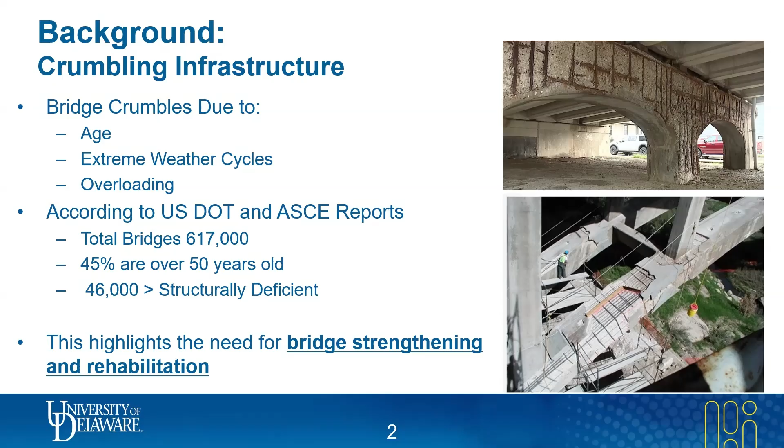Several methods have been used for strengthening existing infrastructure. One is concrete jacketing, in which we add a reinforced concrete layer to the existing structure. Likewise, in steel plate bonding, we bond steel plates using anchors to the existing structure to improve its performance. But these are old and traditional techniques, and they are labor intensive and less efficient. We need efficient techniques using smart materials and smart techniques, and one of them is FRP strengthening.

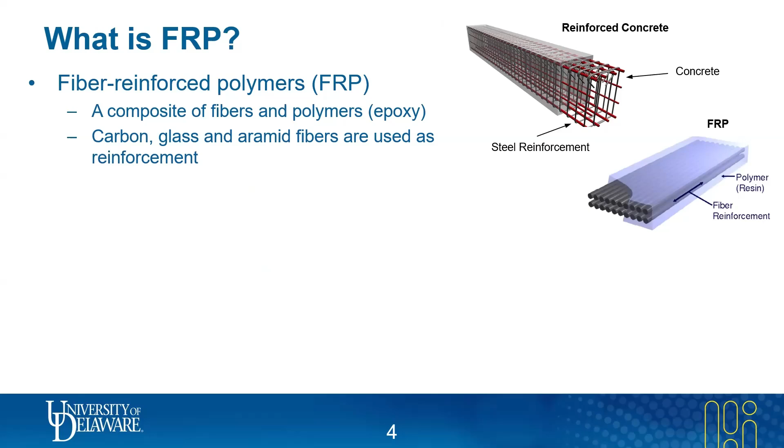So now what is FRP? FRP is a composite of fibers and polymers. If I give you the example of reinforced concrete, which is also a composite material, in reinforced concrete, steel rebars are used as reinforcement and concrete as a matrix. Likewise, in FRP, polymer is used as a matrix, and fibers, which are on the order of micrometers, are used as reinforcement. These fibers can be glass, carbon, or aramid. These are various types of fibers used in FRP composites.

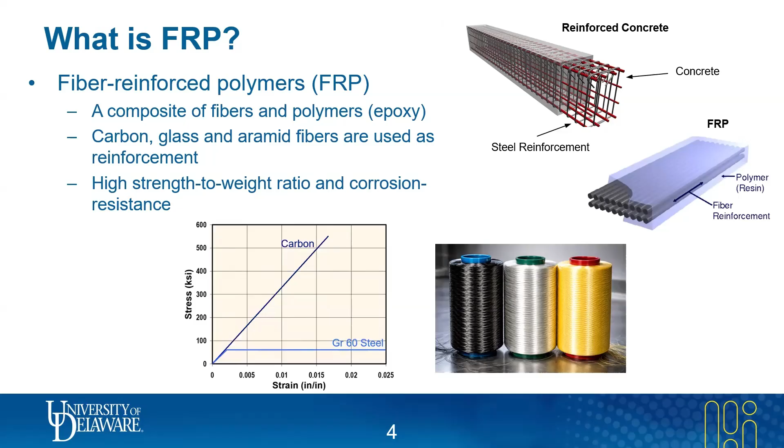Now the question is why we are using FRP. It has very low weight and very high strength, and it is also corrosion resistant as compared to steel. Comparing with steel, FRP is 10 times stronger in tension, and likewise 10 times lighter in weight than steel.

FRP is used in the construction industry in various forms. It is used as rebars, an alternative to steel rebars. Likewise, FRP pultruded sections are used to replace W sections, I sections, and S sections. It is also used as fabric sheets, bonded to existing structures for repair and strengthening procedures, and this is the topic of my presentation.

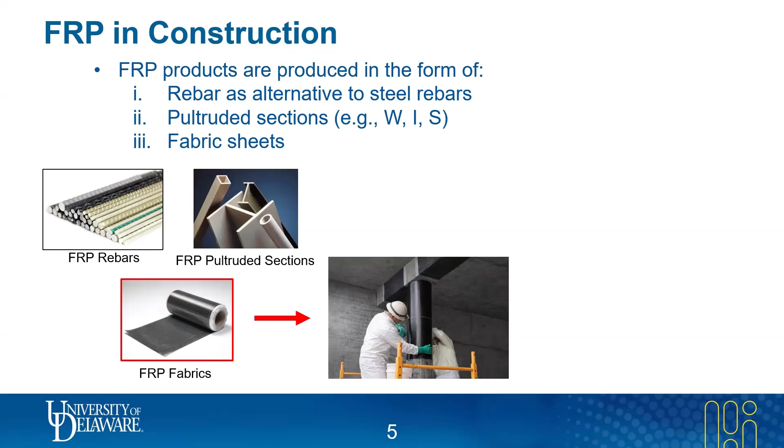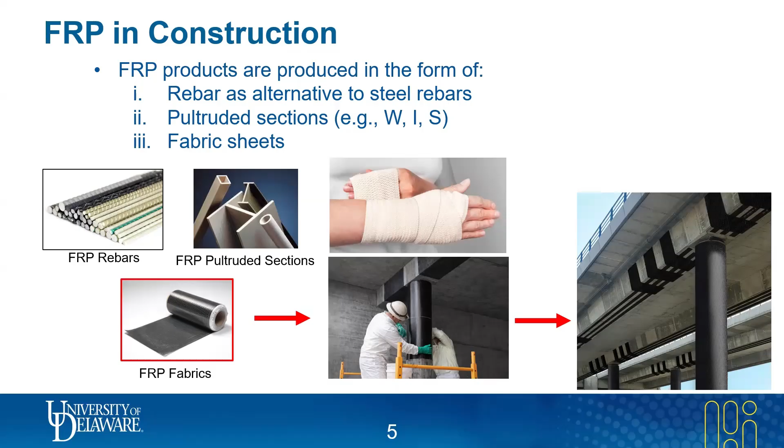In these pictures, you can see how FRP sheets, which are in the order of millimeter thickness, are bonded to the existing surface of structures. This way, you can improve its axial performance, shear performance, and flexural performance. In these images, you can see how FRPs are installed around columns and girders, including U-shaped strips of FRP, called U-wraps.

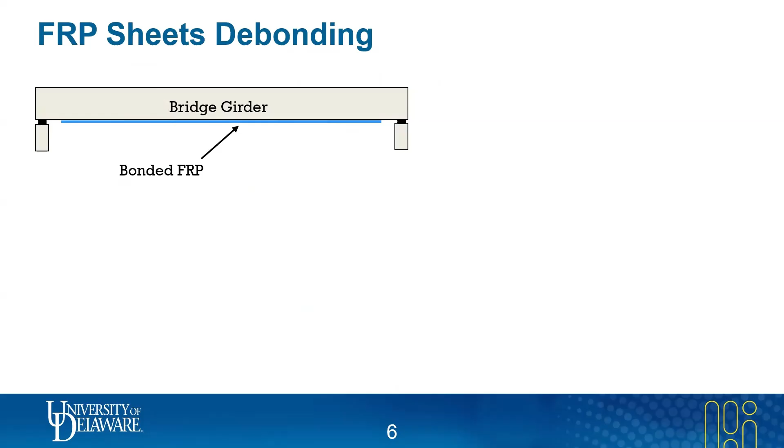There is a problem associated with the use of FRP called premature debonding. In this image, you can see a bridge girder where FRP is bonded to the tension side of the girder, but once the load comes, it prematurely debonds. This debonding occurs at a very low stress level, even around 50% of the strength of the FRP.

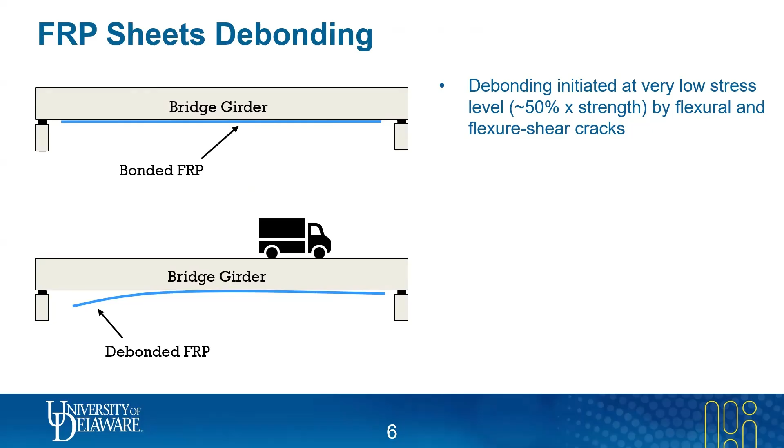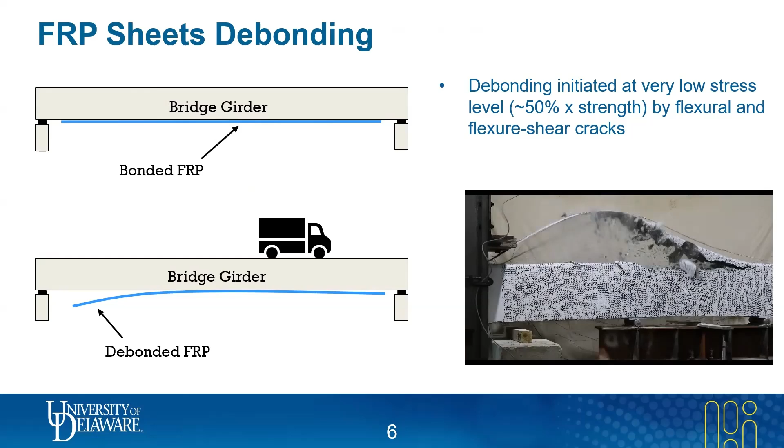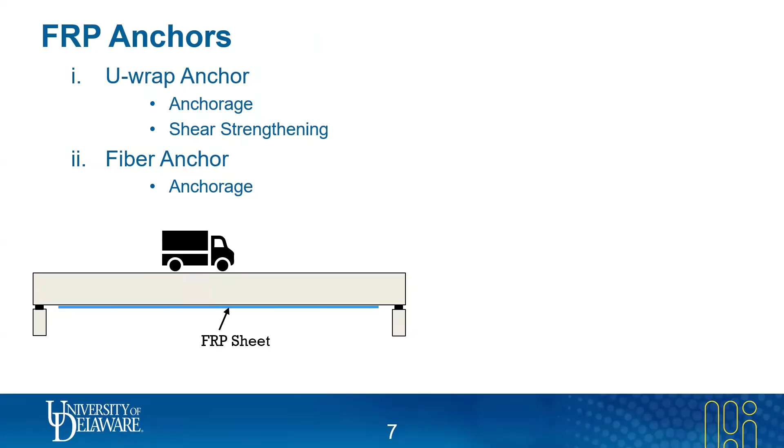Now, how do we handle or mitigate debonding? Various kinds of anchors are used, and the two popular ones are U-wrap anchors and fiber anchors. U-wraps are also used as shear reinforcement for strengthening the shear performance of a girder or beam. They are U-shaped strips of CFRP bonded to the soffit and two side faces of the girder or beam, acting as an anchor for the flexural CFRP as well as for shear reinforcement.

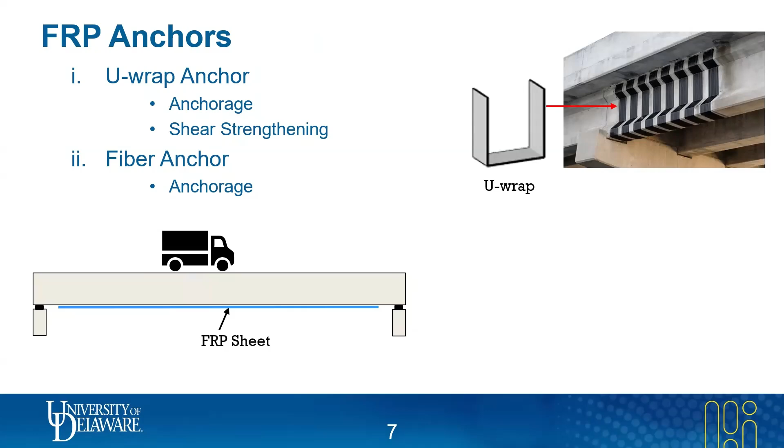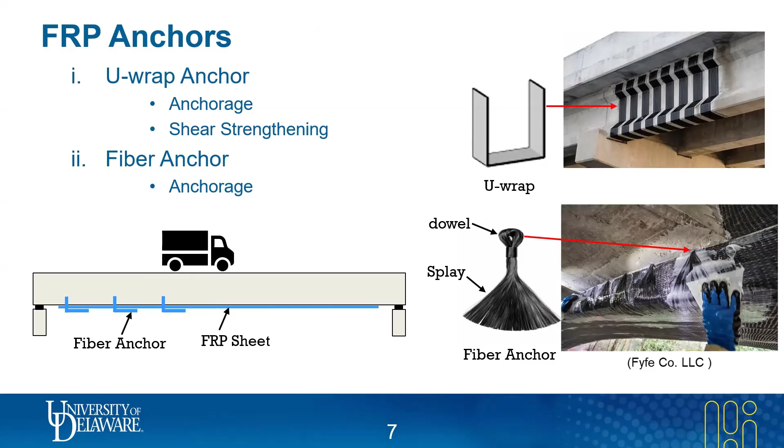The second anchor type is fiber anchors, which are bundles of fibers with two parts: dowel and splay. The dowel parts are inserted into the concrete using pre-drilled holes, and the splay parts are bonded to the existing FRP, introducing a mechanical anchorage between the substrate and the CFRP. You can see in these images how they are installed in the girders.

We also have codes and guidelines, because in the construction industry we need codes and guidelines to protect people from poor construction and design. For FRP, the recently published guideline is ACI 440.13, published in 2024, the first code for FRP application in the construction industry. Likewise, the updated version of the AASHTO code was also published in 2023.

These codes provide ways to compute the contribution of FRP in existing structures. We can compute this easily using the stress and cross-sectional area of the steel, giving us the moment capacity of the beam. But if we add CFRP on the tension side, we can add the moment contribution of the FRP to the existing beam as well. For this, we need the stress in the FRP.

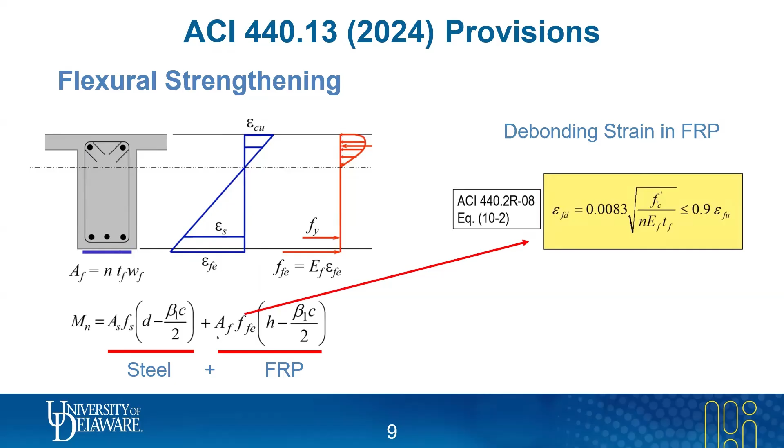To compute stress, you can compute it from the strain, called the debonding strain. This is an empirical equation you can utilize to compute the strain, and from that strain you can further compute the stress to determine the moment capacity.

Likewise, ACI provisions are also available for shear, for supplemental shear reinforcement using U-wraps. For the U-wrap contribution to shear, the same truss model used for steel is applied. In this model, the only variable is the strain in the FRP, computed using these equations, which are functions of concrete strength and the height of the U-wraps.

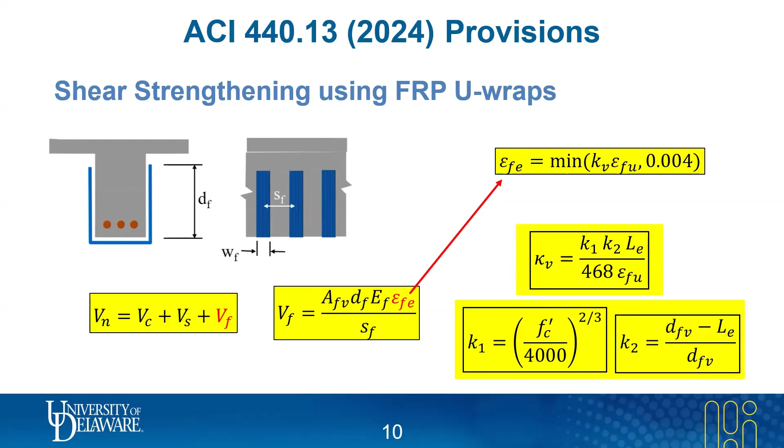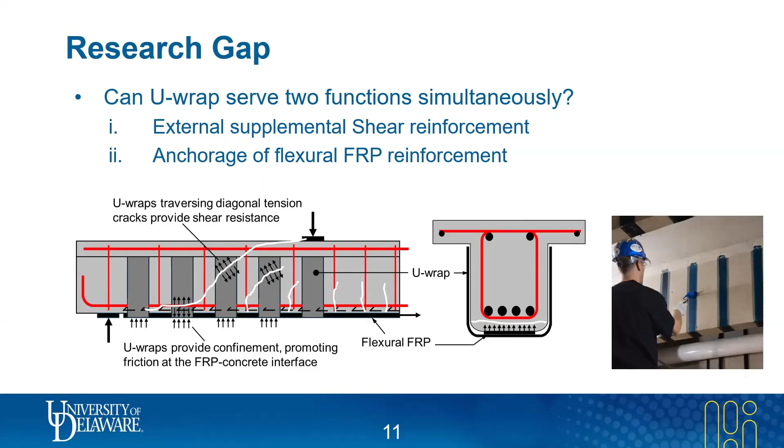So now, what is the research gap? I discussed U-wraps, which are used as an anchor for flexural FRP and also as supplemental shear reinforcement. But the question is, can U-wraps serve two functions simultaneously in a beam? There might be instances where a beam is deficient in both shear and flexure, where we could utilize U-wraps to enhance both flexural capacity and shear capacity. This is the research gap not yet investigated in existing literature, and we aim to find the answer to these questions.

To fill this gap, we designed our study with two objectives. The first is to investigate the complementary shear strengthening and anchorage effect of U-wraps in reinforced concrete beams strengthened with externally bonded CFRP laminates. The second is to make design recommendations for the efficient use of U-wraps as supplemental shear reinforcement and anchorage. To achieve these objectives, we developed a test matrix of 18 large-scale reinforced concrete beams.

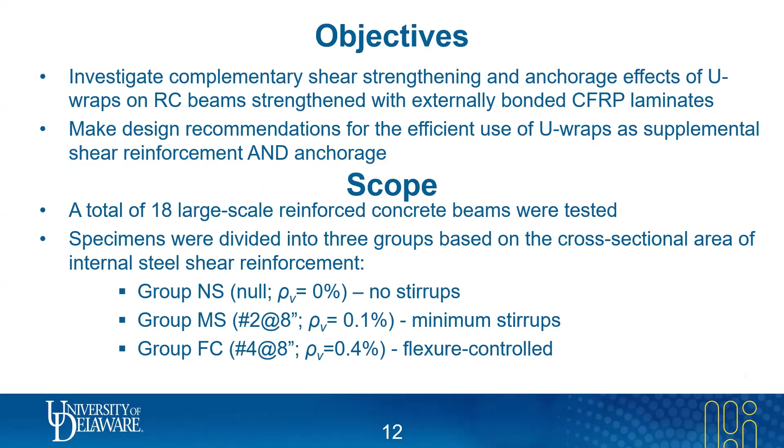We divided the beam into three groups. The first group is called NS, with no stirrups. The second group is with minimum stirrups, number 2 at 8 inches center to center. The third group we designed with sufficient shear reinforcement, so they just fail in flexure, and the reinforcement was number 4 at 8 inches center to center.

This is the drawing of the specimen we tested. You can see it is 16 feet long, and it is tested on a 14 feet span. We use typical concrete with 4,000 psi strength, and the reinforcing steel was grade 60.

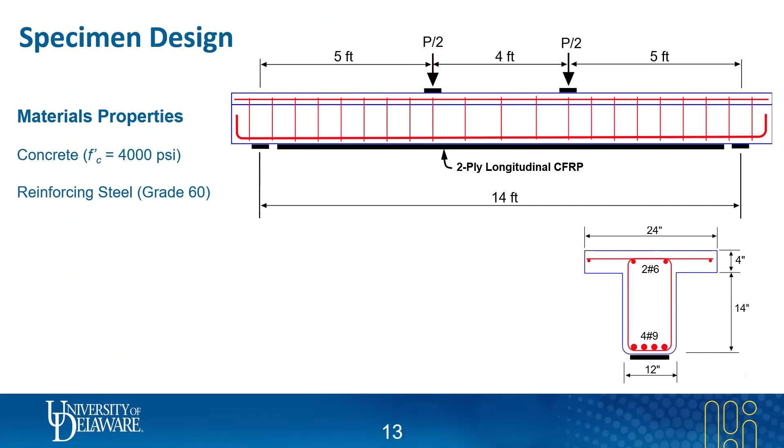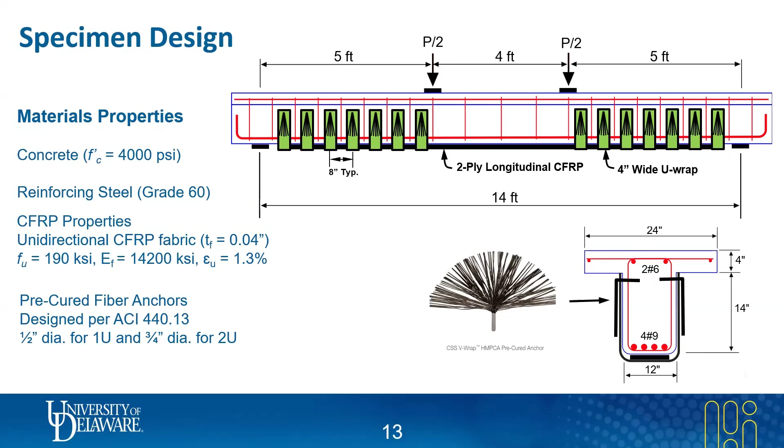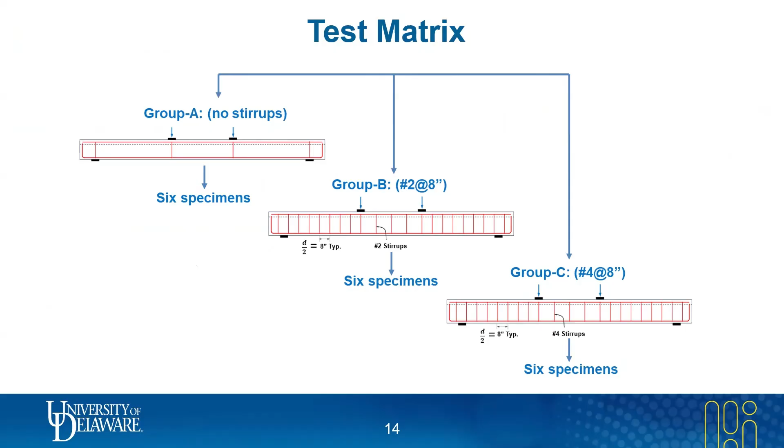These are the drawings of the control specimen in each group. In the first group, we have no stirrups. In the second group, we have number 2 at 8 center to center stirrups. And in the third group, we have number 4 at 8 center to center.

These are the drawings for the specimen in which we use various configurations of U-wraps. For group A and B, in which we have minimum shear reinforcement and no stirrups, we use the same configuration of U-wraps. You can see we have 0 U-wrap meaning no U-wraps, then single ply U-wraps, then 2 ply U-wraps, and then anchored single ply and 2 ply U-wraps.

On the right side, you can see group C specimen. In these specimens, we only install U-wraps without any fiber anchors. And for the combination of U-wraps, you can see again we have single ply, 2 ply U-wraps, and we also introduce reduced height U-wraps and full U-wraps.

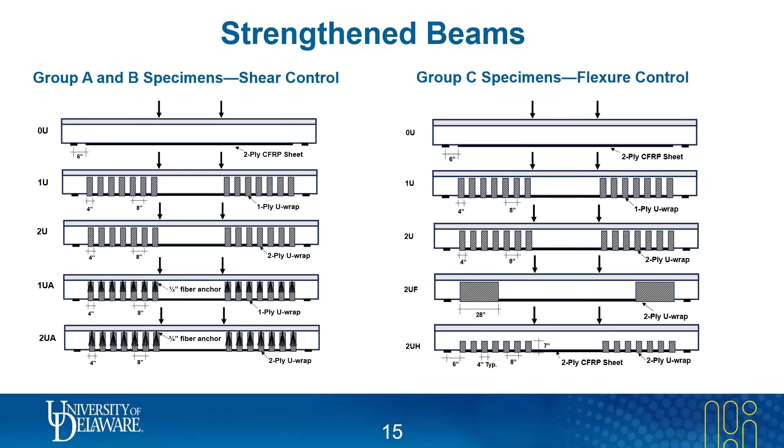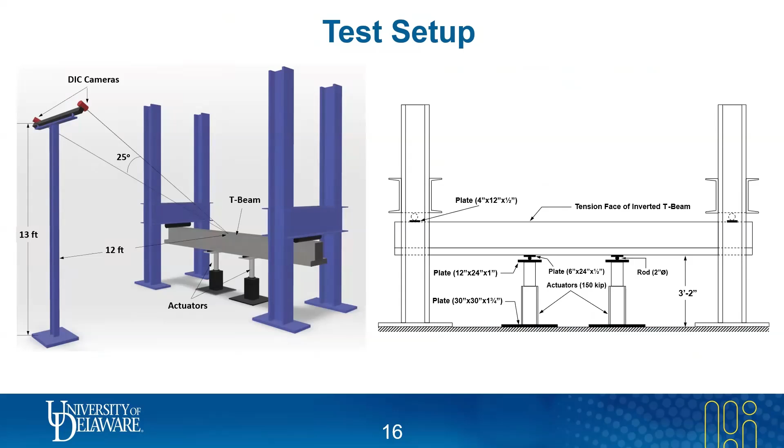We tested these specimens in a typical 4-point bending setup. We installed the beam in inverted orientation, so as to utilize digital image correlation for full field strain mapping and displacement.

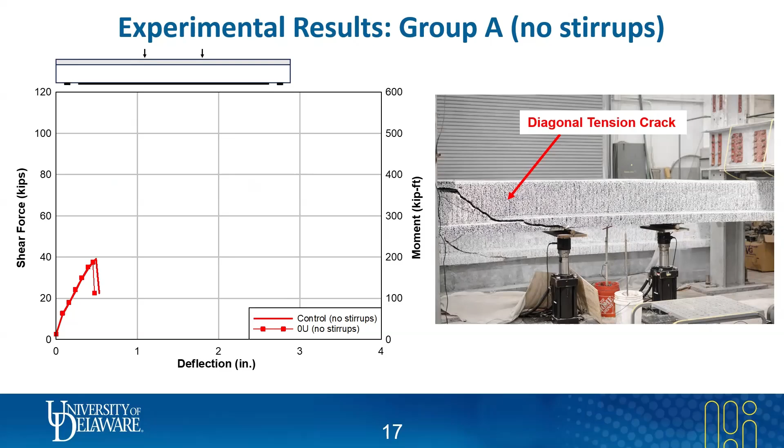Now I'm presenting the results, and I will go group wise. Starting from group A, in which we have no stirrups. On this plot, you can see the shear, the load displacement plot. The first specimen, which is the control specimen without any U-wraps, you can see its load displacement plot. On the right side, you can see it failed in typical diagonal tension cracks, and you can see the crack pattern as well.

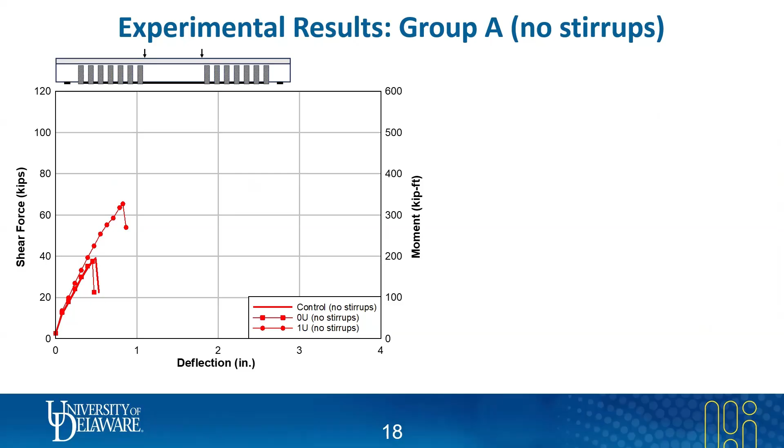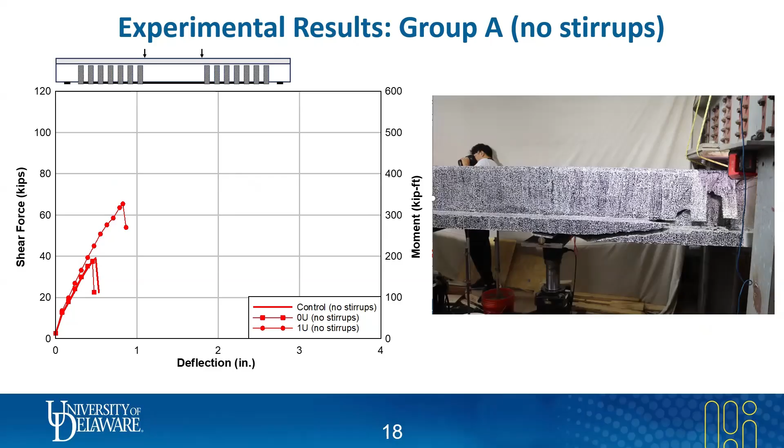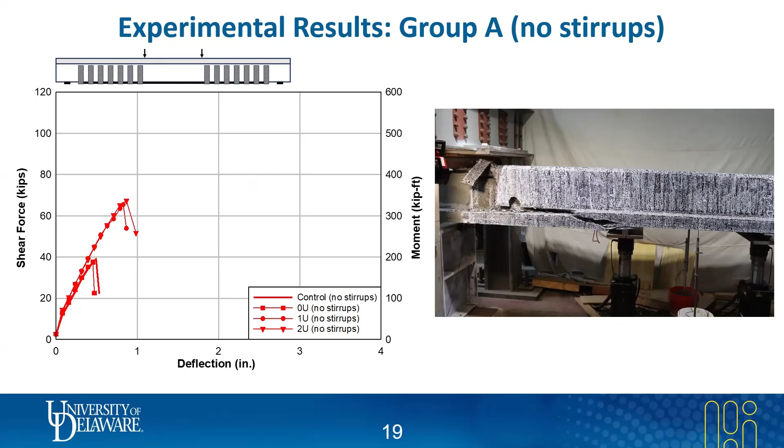Then we added single ply U-wraps. By adding single ply U-wraps, the capacity increased from around 40 kips to more than 60 kips, and the failure mode is U-wrap debonding followed by typical diagonal tension cracking. Then we add a second ply. By using the second ply, we didn't achieve any considerable enhancement in shear capacity, and we also achieved the same failure mode: U-wrap debonding followed by tension cracking.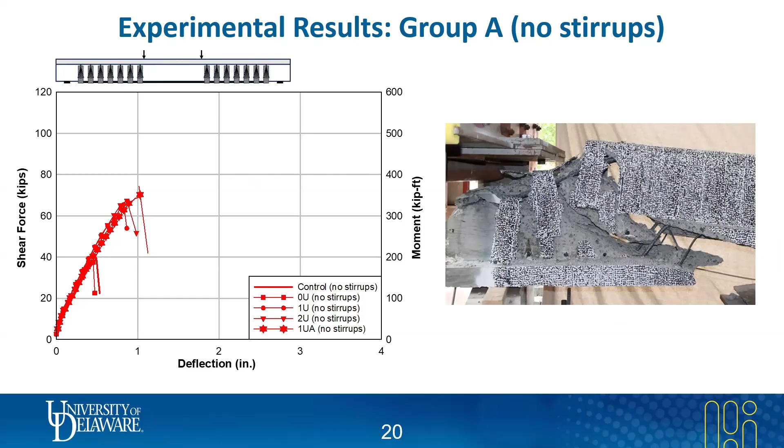Then we install single ply U-wraps with anchors, and in this case we also achieved shear failure, with capacity enhanced a little bit by 10%, and we achieved the typical shear failure as well. Then we further add the two-ply U-wraps with fiber anchors. In this case, the beam transitions past the yield point, and the capacity is further increased to more than 80 kips. We were able to achieve up to 95% increase in capacity using anchored two-ply U-wraps, and this also failed in shear.

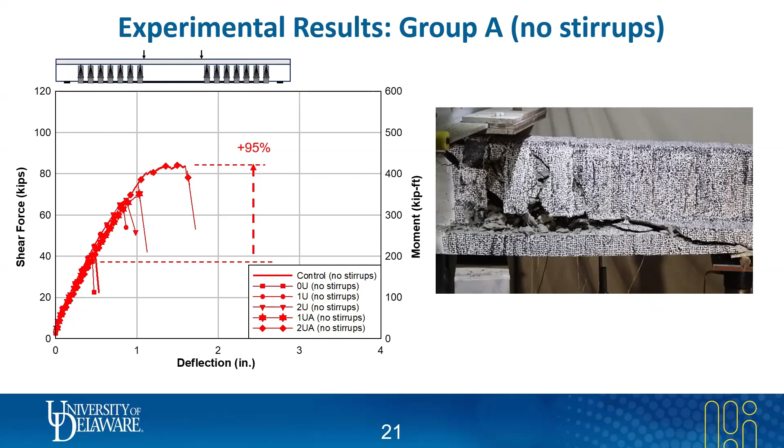Now I'm moving to the second group. In this group, we install number 2 stirrups at 8-inch center. Now you can see the load displacement response of the control specimen. We achieved more than 45 kips capacity, and you can see the typical diagonal tension cracking failure mode on the right side.

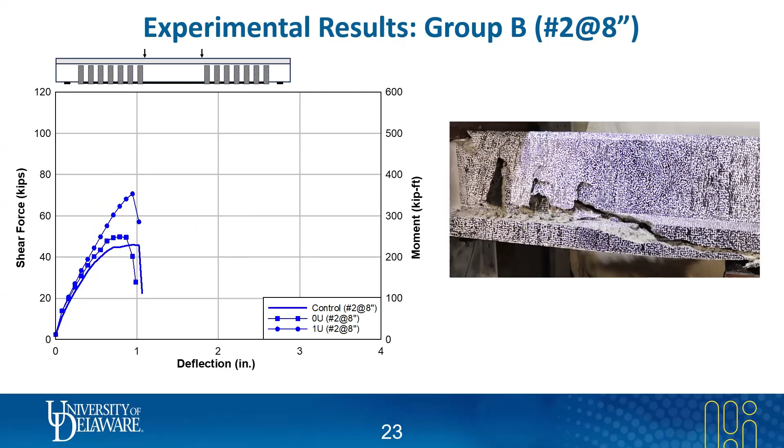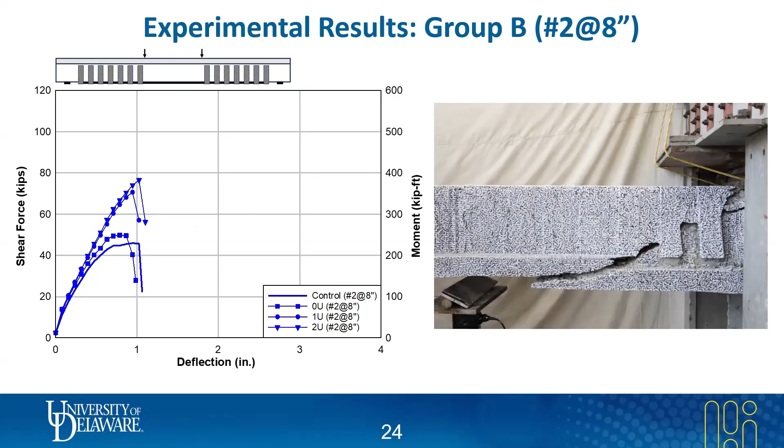If we then add the single ply U-wraps, the capacity was increased, and we also achieved the same failure mode. Then by adding two-ply U-wraps, we also achieve capacity enhancement, but the enhancement compared to single-ply U-wrap was not significant. The failure mode, you can see again, is U-wrap debonding followed by tension cracking.

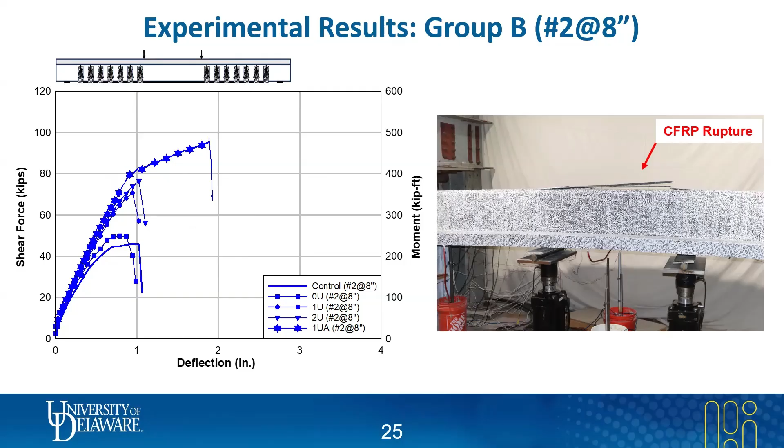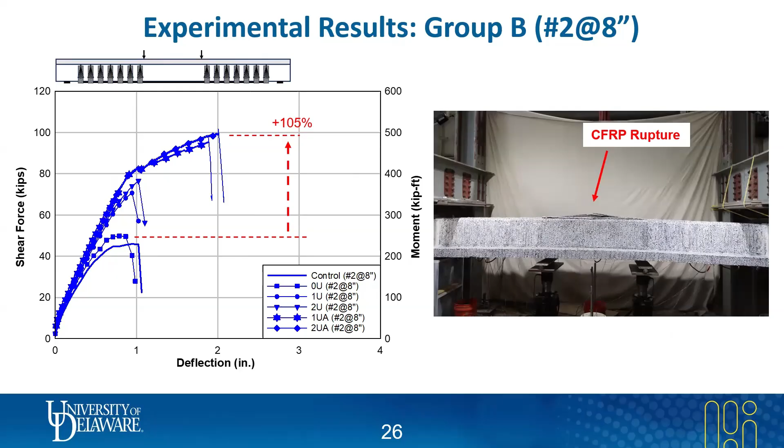Now, when we use the anchored single-ply U-wraps, the failure mode changed from shear to flexure, and you can see we achieve flexure failure, specifically flexure CFRP rupture, with capacity also considerably enhanced. Also, by adding the second ply anchored U-wrap, we again achieved the same CFRP rupture failure, and the capacity increase was around 105% compared to the control specimen.

Now I'm moving to the third group. In this group, we have only flexure control specimens. This is the typical load displacement plot of the control specimen. You can see we have a trilinear plot: uncracked, followed by cracking, and then we have the yielding of the steel as well.

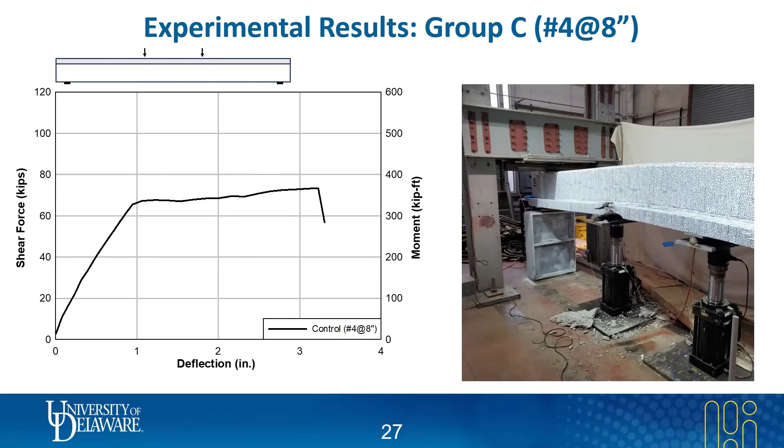This is the specimen with 0U, which has only flexure CFRP. By adding flexure CFRP, we increase the capacity up to 80 kip, but the failure mode is premature IC debonding, and we didn't utilize the full capacity of the CFRP.

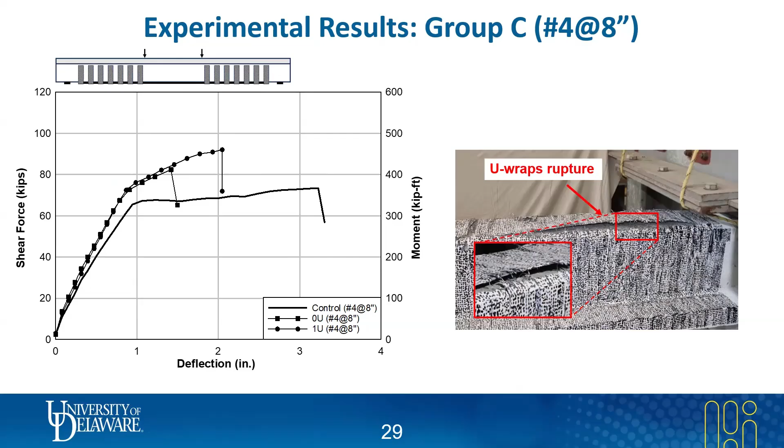So then we add the U-wraps. By adding U-wraps, we increase the moment capacity of the beam, and the failure mode also changed from IC debonding to rupture of the U-wraps. Further, by adding two-ply U-wraps, we were able to mitigate the ICD bonding failure mode, and in this case the failure mode was U-wrap debonding instead of rupture.

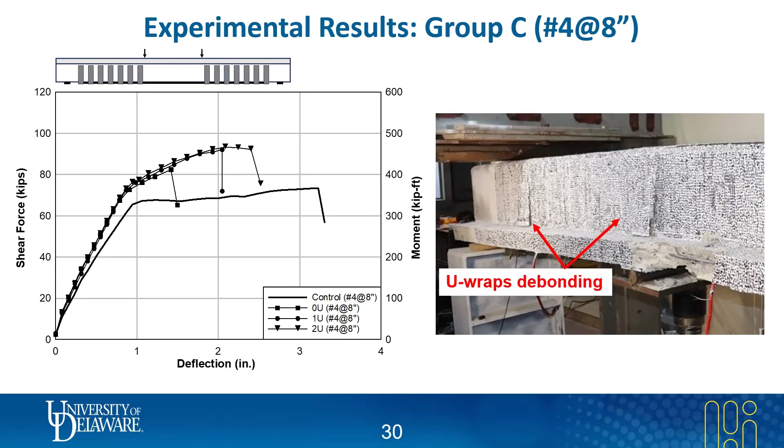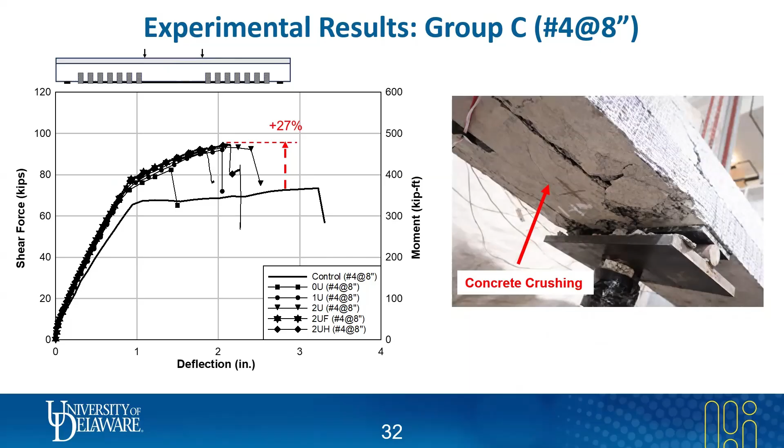In this group, we were able to achieve up to 27% increase in moment capacity. So this is the overall summary.

On the left plot, these are all the shear control specimens, and in this plot you can see we calculate the contribution of each component. The black bar represents the shear capacity of the specimen, and the blue represents the concrete and steel contribution,

and the green represents the FRP contribution in shear for each specimen. You can see for the anchored two-ply U-wraps, we were able to achieve even higher shear contribution from CFRP. On the right plot, they are all flexure control specimen, all failed in flexure.

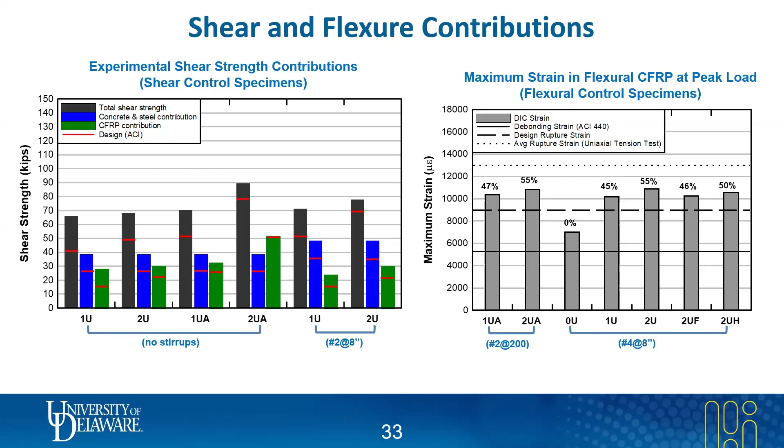In these plots, you can see by adding U-wraps we were able to increase the strain in the flexure CFRP. For the 0U specimen, where there was no U-wrap, compared to this specimen, we were able to achieve up to 55% increase in the strain, and we increased the performance of the U-wraps.

We also compared the design and the experimental capacities. Using the existing code guidelines to compute the capacity and compare with the experimental, you can see all the specimen capacities are conservative.

The current design guidelines have no provision for the U-wraps or for the anchors. So what we did, we introduced an anchorage coefficient called Ka, and we assumed a value of 1.4. Using this coefficient in the existing ACI model, we computed the capacity of the anchored specimen, and the results were still conservative.

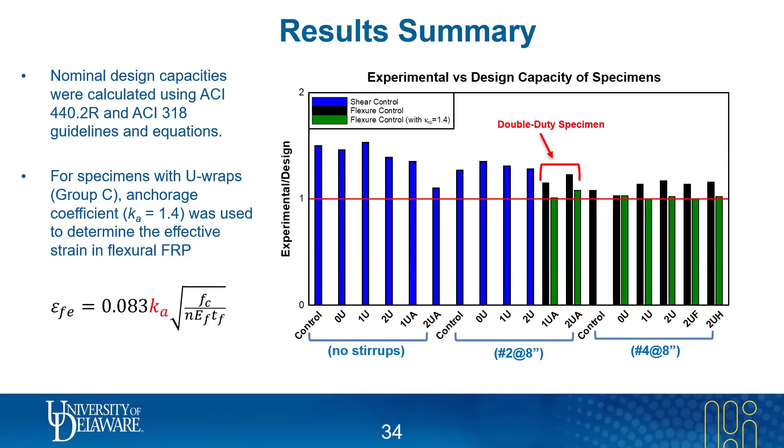So this means we can introduce this coefficient into the existing model for further revisions. These are the final conclusions: U-wraps can effectively serve as a supplemental shear reinforcement while providing anchorage to the CFRP.

We also observed in specimens with number 2 stirrups, a transition from shear to flexure failure. In that specimen, we were able to achieve shear capacity up to 95% and moment capacity up to 35%. In flexure control specimens, all achieved almost the same capacity,

but the failure modes changed from IC debonding to U-wrap debonding or concrete crushing, and we were able to achieve up to 27% moment capacity enhancement. We also observed that U-wrap anchor with reduced height performed as well as the full height U-wraps.

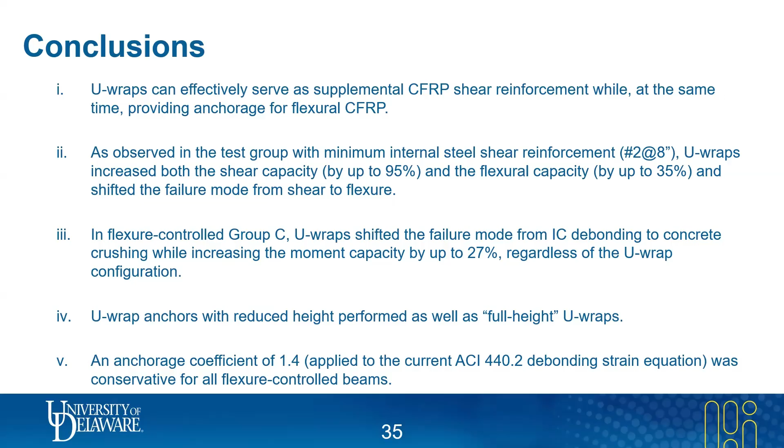Finally, if we introduce the anchorage coefficient to the existing model, we will still be able to achieve conservative results. In the end, I acknowledge the sponsoring agency, which helped us financially and technically in this research project.

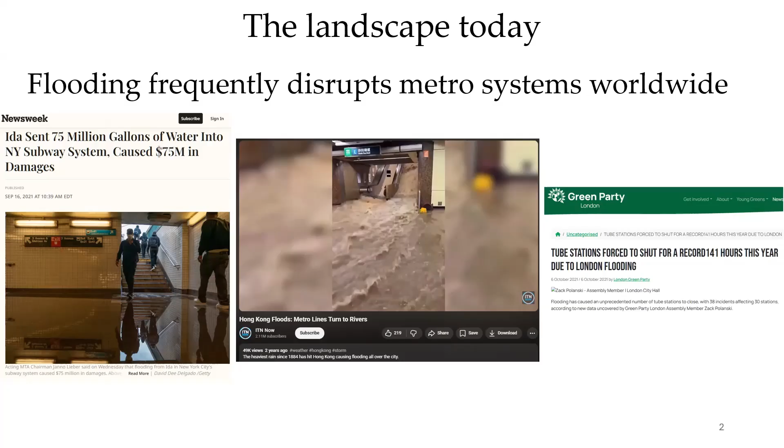I wanted to talk more about the context we are living in. Climate change has increased the number of times we see flash flooding events happening around the globe. These events usually affect more distributed infrastructure systems, for example, metro systems. 2021 was a very particular year because we saw three of the most important metro systems around the globe being affected by these flash flooding events—in New York City, London, and Hong Kong. When flash flooding disrupts these metro systems, it not only disrupts normal functionality but also endangers the users of these systems.

So what can we do in particular to improve the flood resilience of these metro systems? We have two options. The first: we can take actions before the flood happens—a pre-event action—that is retrofitting critical network components. For example, we can choose some elements of the network and improve the drainage system. The second option is taking actions after the flood happens—a post-event action, such as efficiently scheduling recovery resources.

There have been some studies that determined that the first option, taking actions before the flood happens, is of course more effective in the long run. But the problem with this kind of implementation is that it's more expensive and takes more time to implement. That's why we decided to focus on the second approach, scheduling recovery resources. Of course, in an ideal world, many of you may be thinking, why not apply the first option first? Well, in an ideal world, when everybody has unlimited resources, that would be the best option. But given that's not the case, we are working on the second option.

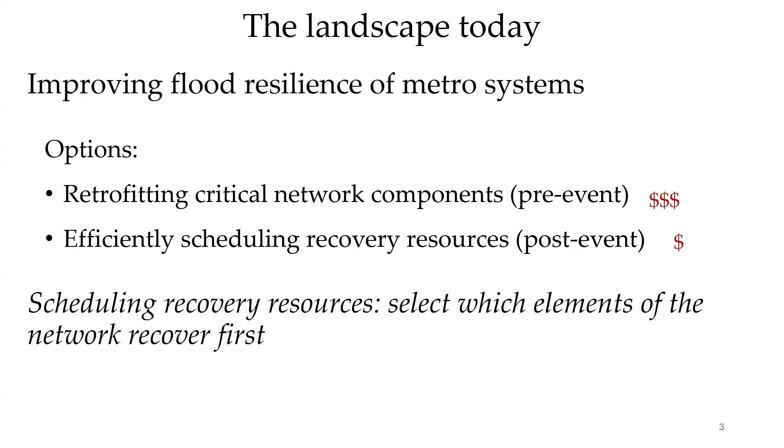But also we have to consider that we are going to have some limited resources to do so. For this, we wanted to implement reinforcement learning. Reinforcement learning, in simple words, is trying to optimize a sequence of actions. It has been applied in many fields now, for example in large language models such as Gemini and ChatGPT, also in robotics, and in autonomous driving vehicles.

So reinforcement learning can solve problems that humans today struggle to solve. In our case, for our problem in particular, we want to transfer all that heavy load of taking decisions from humans to machines, because humans have limited information, we may have some bias in our decisions, and it can take us more time to take those decisions.

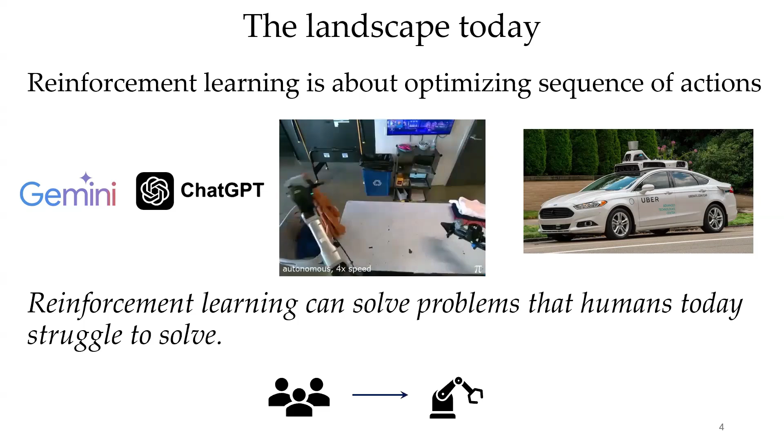So probably many of you may be already wondering whether this scheduling recovery resources problem had not already been solved. And of course, yes, there have been some previous approaches. For example, some people decided to implement static policies, trying to decide which elements of the network to recover first based on some characteristic of the network, for example centrality, or which nodes are going to be the ones more connected to the others.

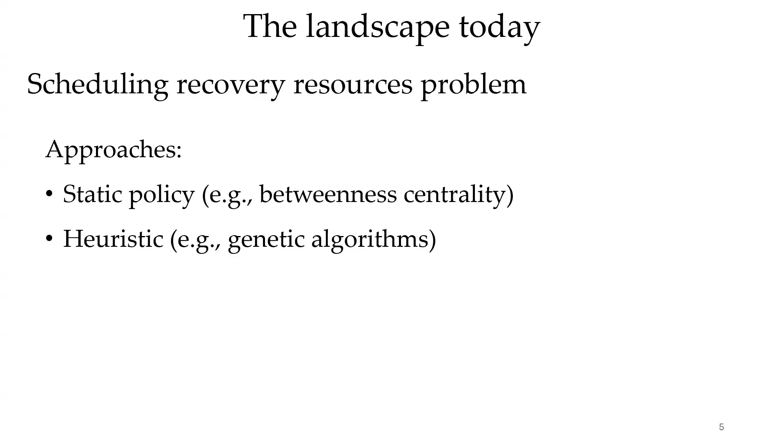Some other people decided to use heuristics, for example genetic algorithms. Both of these methods have already been tested and evaluated in terms of real-time applicability, that is how quick we can get an answer for our problem, and also in terms of optimization effectiveness, how good these kinds of solutions are.

Talking about static policies, as the name suggests, they can give you very quick solutions, but compared to heuristics, the solutions are not as effective. The main issue with heuristics is, of course, you can have very good solutions, but it takes a lot of time to compute them, so they are not good for real-time applicability.

So in this context, we wanted to know how reinforcement learning solutions can perform compared to these previous approaches.

Talking more about the problem, we have our urban railway transportation system, or URTS. This system is composed of stations and tracks. We can go from station to station through these tracks. These stations are going to be represented by nodes, and the tracks are going to be represented by edges. All of these elements have their own properties, and they also define how much damage they're going to receive during a flooding event.

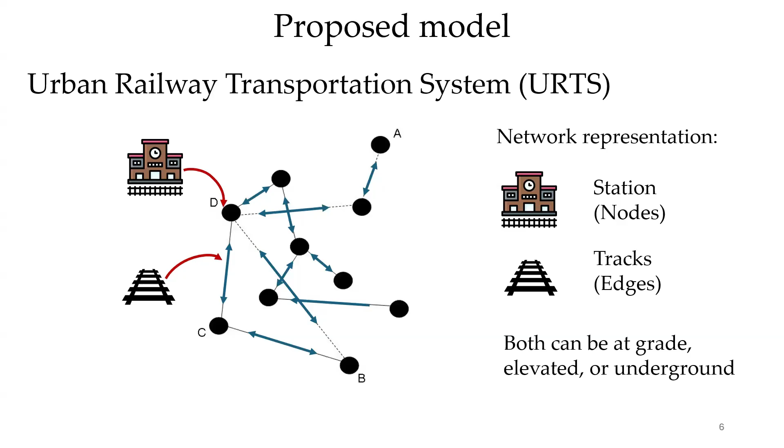For example, that could be at grade, elevated, or underground. Once we have the model for our network, imagine that we have a flash flooding event. Of course, some elements of the network are going to be affected, some others not, because it doesn't rain evenly in the whole area. And also, as I mentioned, we have these properties of the element that differentiate how much damage they receive.

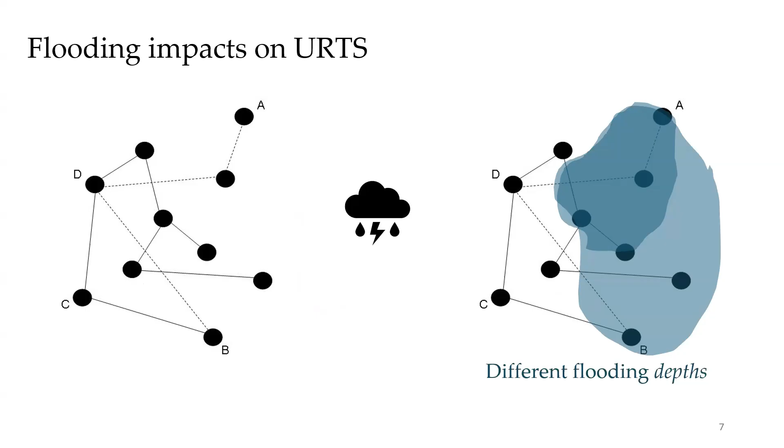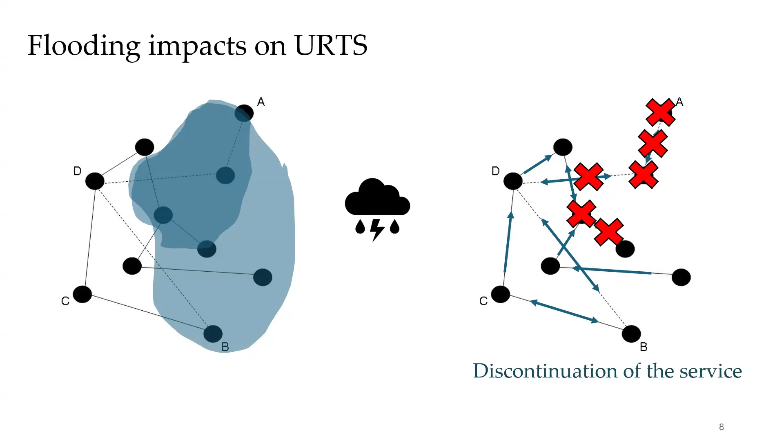So having these different flooding depths, we can determine which elements of the network are going to be damaged, so how they're going to be disrupted. For example, there are some stations that are not going to be open for the public, and some trains are not going to be able to go through some tracks. So there's going to be some discontinuation of the service.

With this, we can quantify the resilience in the network. In particular, we are interested in the percentage of revenue loss. This is just comparing how much revenue we would have in the normal state of the network, compared with the damaged state of the network.

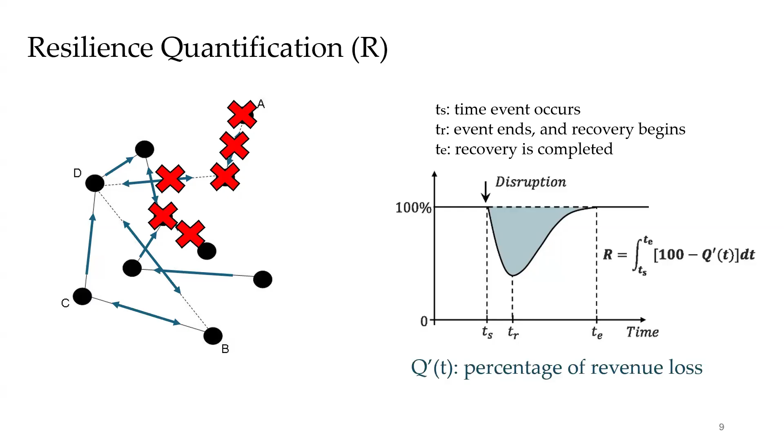So we are interested just in taking actions after the flood happens. As you can see in the plot on the right, we are interested in what happens after time TR, that is when the event ends and recovery begins. Our main objective here is trying to reduce post-failure impacts.

And how do we do this? By trying to deploy recovery teams effectively. So what do we mean by effectively? We want to reduce the time it takes to recover the system completely, and at the same time reduce the revenue loss as much as possible.

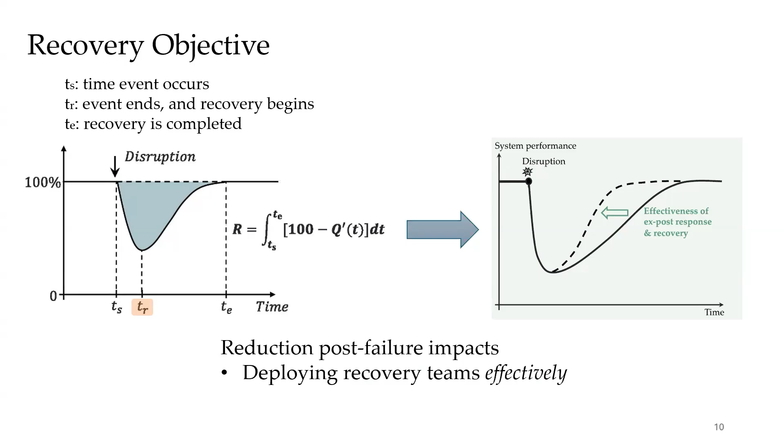So which recovery resources do we have in our network? We have three of them. The first one, and the most effective one, is having a team with pumps. These pumps are more effective in pumping out water, of course.

But we also have the manual clean and natural recovery that are inherent to the stations. They exist already, but the problem is we cannot use them in all cases. Imagine a completely flooded station - we are not going to manually clean it. So progressively, while we deploy our recovery resources, these pumping teams in the network, we are going to see the network recovered.

So now that we understood this basic idea, we can see our case of study. That's London's urban rail system, composed of many edges, tracks, nodes, stations. And of course, we're going to have groups of them that are the lines, and that also determines the cascading effects in the network.

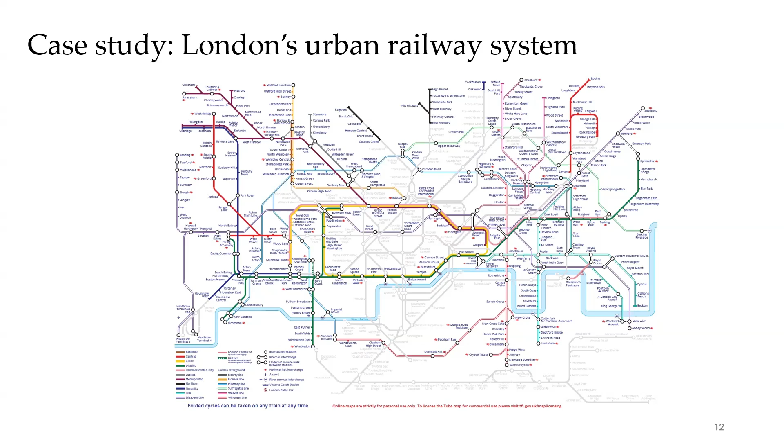So thankfully, Dr. Wei Bi processed all that information during her PhD, so she provided us with this information so we can continue with this study.

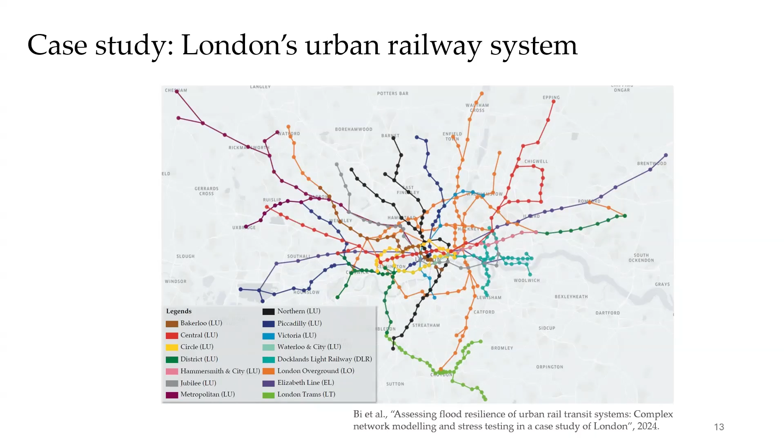Talking about the reinforcement learning problem, we have to define two things: the environment and the agent. The environment in this case is the representation of the network - how is the current state of the network, how many elements are damaged, and also the current deployment of the recovery teams.

In the case of the agent, it's represented by a policy. The agent takes some actions, and this affects the state of the network. Some elements are repaired, some not, and that's also an observation for the agent. Additionally, we have a reward that tells us whether this action was good or bad.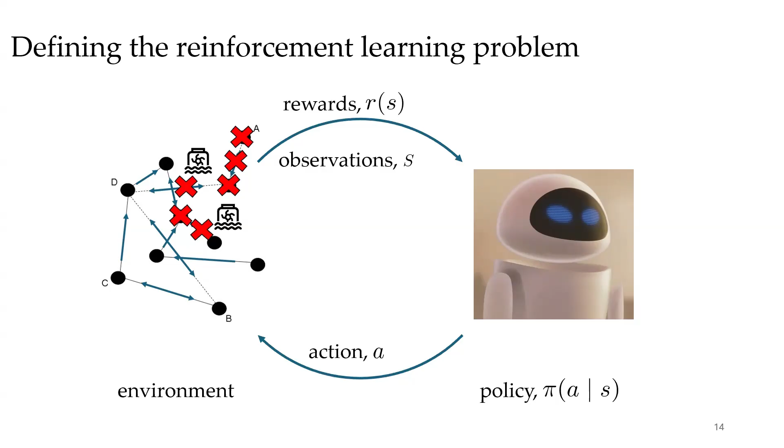As I mentioned previously, reinforcement learning is just about trying to optimize a sequence of actions. So what reinforcement learning method should we use? There have been a lot of new algorithms proposed by many people. They have their own pros and cons, but in particular we decided to go for a well-established reinforcement learning algorithm because of two reasons.

We decided to use the proximal policy optimization algorithm because it's widely used and well documented, and that helps us with our implementation. The second reason is because it supports stable learning and generalization.

I'm going to talk more about the policy and policy training in the next slide. But talking about generalization, in particular, we want to solve not only one single case of flooding event, but many unseen cases as well.

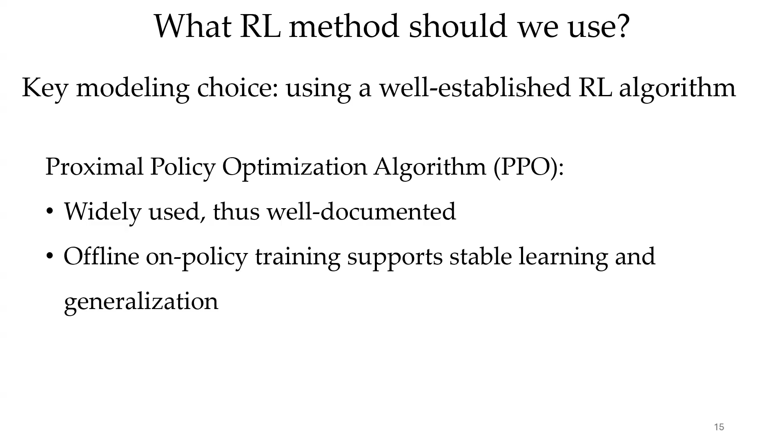First, we have the actor that rolls out the policy. The actor takes some actions, and this interacts with the environment, and the environment changes the states of the network. Then we have a critic that tells us whether this action that the actor took was good or bad.

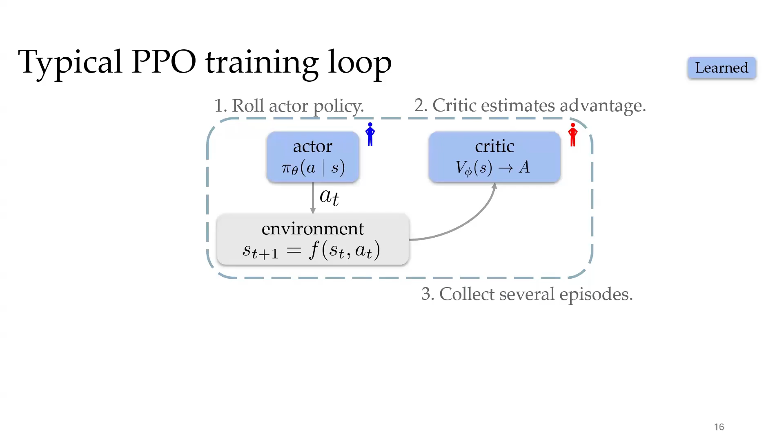So we do this many, many times. We collect a lot of experiences for many episodes, for many environments - when I say environments, I mean many flooding events. And then with all that experience, we select a mini batch of them and update our policy.

Usually in PPO, and I know these equations seem a little difficult, the main idea is that we want to control how the new policy compares to the old policy. That's why in the loss function we have a clip function, in order to control how the new policy is updated compared to the old one.

Then we have our value function error that improves how well the critic is estimating whether the action taken by the agent was good or bad. Then we have our entropy bonus, which is just a function of the policy, and this also helps the actor explore more of the environment.

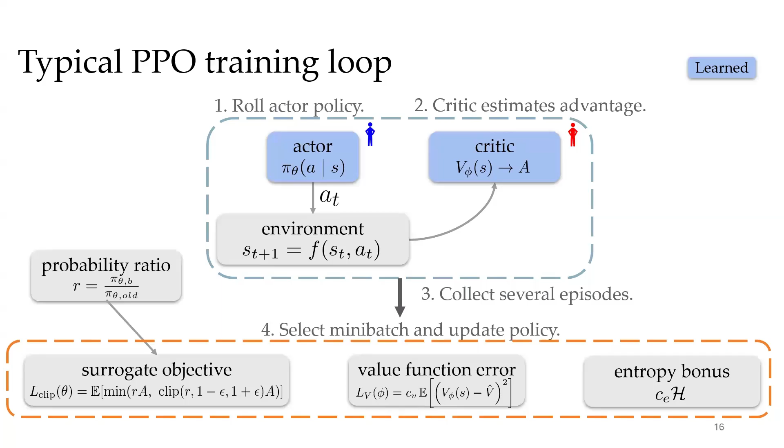Hopefully I'll have more questions at the end, but probably many of you may be wondering whether this approach works or not. As with every computer science algorithm that is implemented, the way you implement it changes the results for good or for bad. I wanted to show the alternatives that I tried in my algorithm.

For example, for a 1,000-year flood event, I'm showing in this slide the operability fraction - how many elements of the network are repaired over time - and also the cumulative revenue loss over time. One architecture in particular decided to stop repairing the elements, and we can see that the revenue loss increased over time. This is the blue line there.

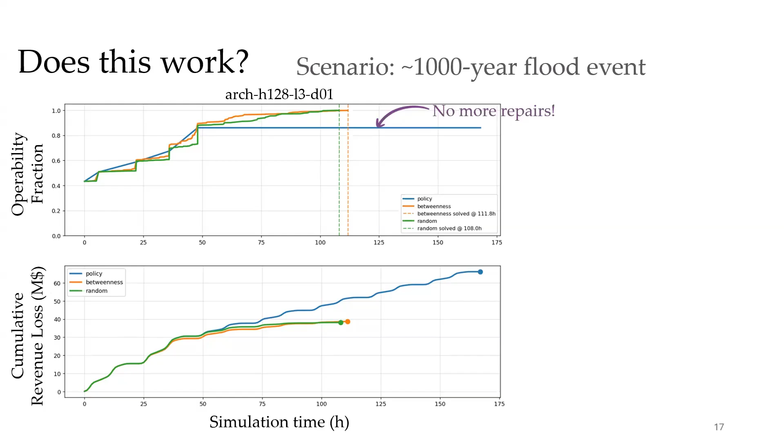So in these two plots, I'm comparing it with the betweenness centrality static approach, and also with a random policy that just selects elements of the network randomly to be repaired. In computer science, this is pretty common depending on the approach you take to implement your algorithm.

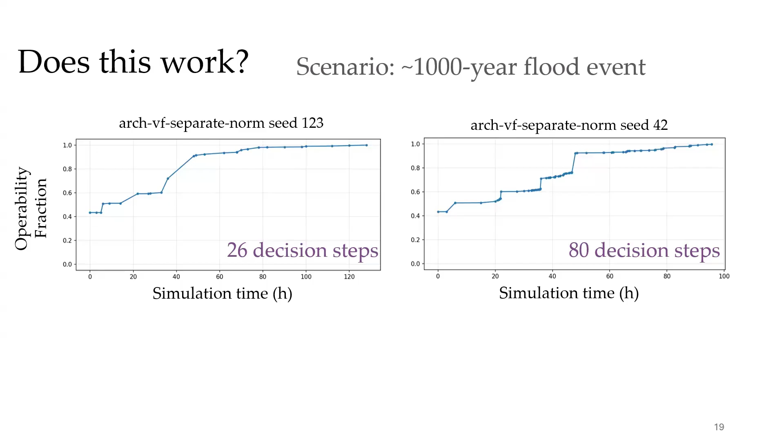This is a completely unexpected behavior for us, that two agents decided to do different things. And that's also like our humanoid trying to do something that we didn't expect to reach the goal.

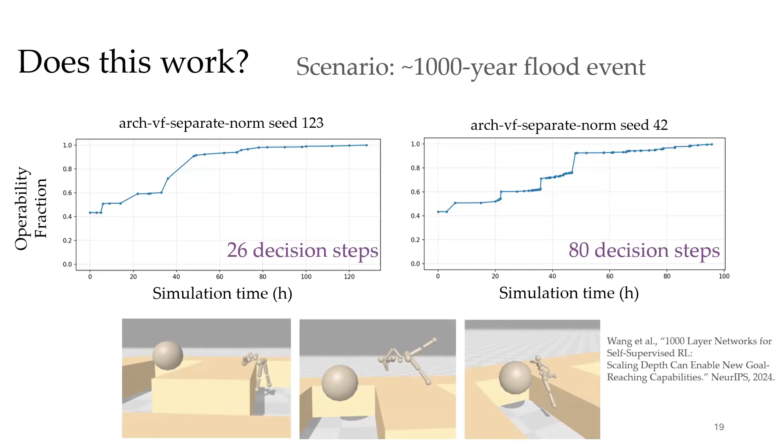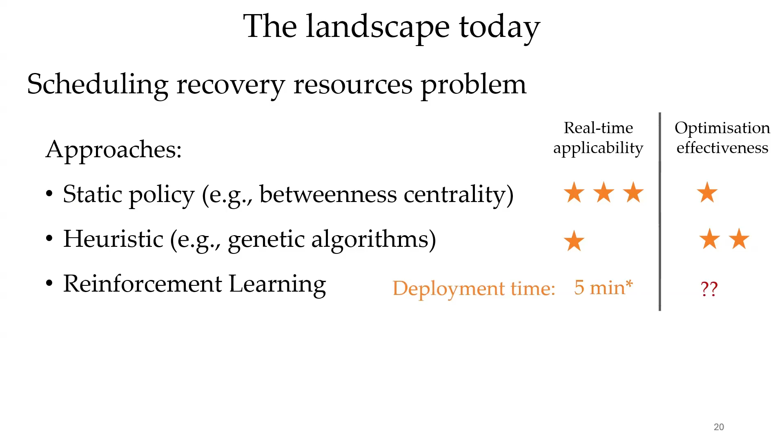So again, with the experiments we've run until now, we can see that reinforcement learning can be good at real-time applicability. Once our agent is trained, we can deploy it, and for a 1,000-year event, it can solve the problem in just 5 minutes. But we have to consider the training time. The training time is like, if I can make an analogy, studying for your exam for 10 hours, and then in 10 minutes you can solve the exam.

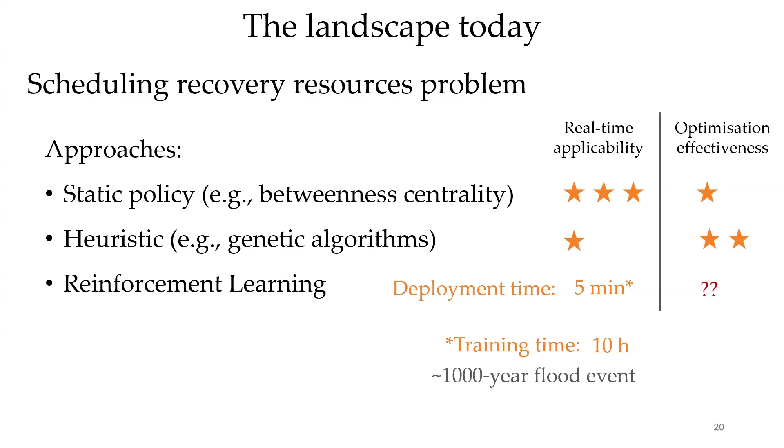So the key takeaway is that reinforcement learning is a possible way of doing efficient resource scheduling with some implementation backing. As I mentioned, the way you implement it is going to affect your results at the end of the day. The second takeaway is under the model assumptions, the approach appears computationally feasible for real-time deployment. Once we deploy our agent, it takes just 5 minutes to infer our result.

Future directions for our research: we still have to run more experiments. There are things we can still improve, for example training our agent for longer time. We still don't have results for heuristics, so the next step is trying to compare it with heuristics. Finally, a future direction is trying to understand and ensure results—we have to interpret why the agent decided to take those actions.

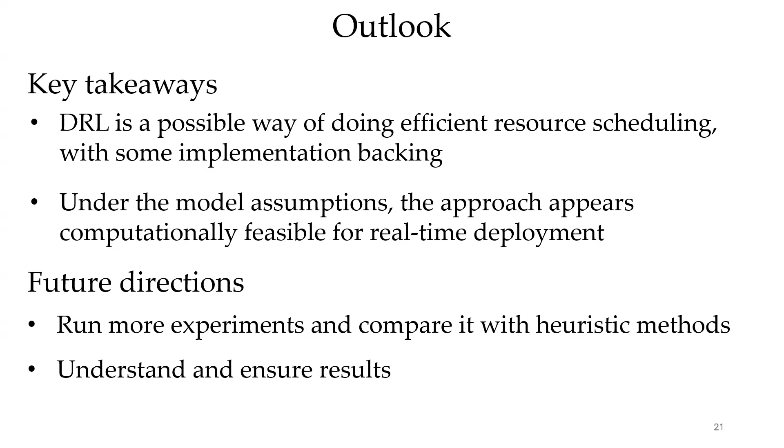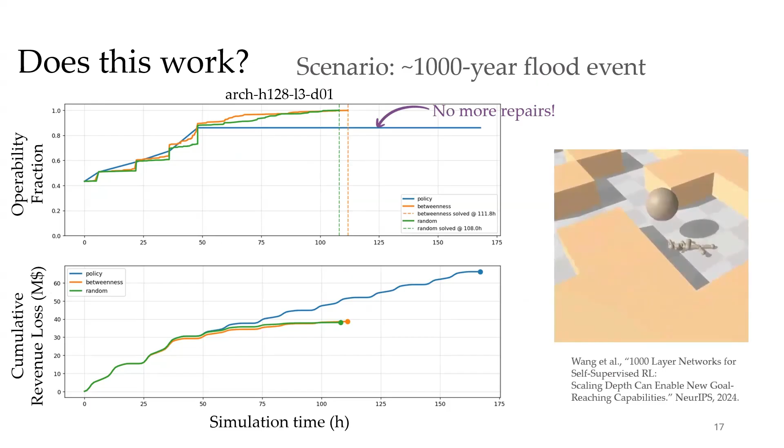This regards whether we should implement more things or have more trials to get a solution, and this is what people in computer science do. Of course we are going to have a lot of errors, and that's also what happens in engineering. But since we cannot always interpret things, we cannot say this is going to be the 100% best approach we can have. So we have to have many trials, especially for very new problems like this, where we have a network and have to learn different things compared to an image or video—something we already have in ChatGPT or Gemini. We have to consider other aspects of the network that may give different results.

Hopefully I could answer the question.

Somehow, I guess the question was more like—you have your example here with this lab, with this maze, and similar with this network for London. But the question would be, how can someone in New York use your approach? Do they have to retrain it, or how do you transfer this information to other networks, since it's very particularly tuned now to the London Tube network?

That's another question I've also been asking myself. Some people, for example for generation of images, something you can have now in ChatGPT, use patterns during the training process of the neural network. These patterns can be shared not only to identify things but could also identify videos and images. A similar approach could probably be implemented in networks—we can get patterns during training that we can also share to other networks. But that's pretty new; it could also be implemented to networks as well.